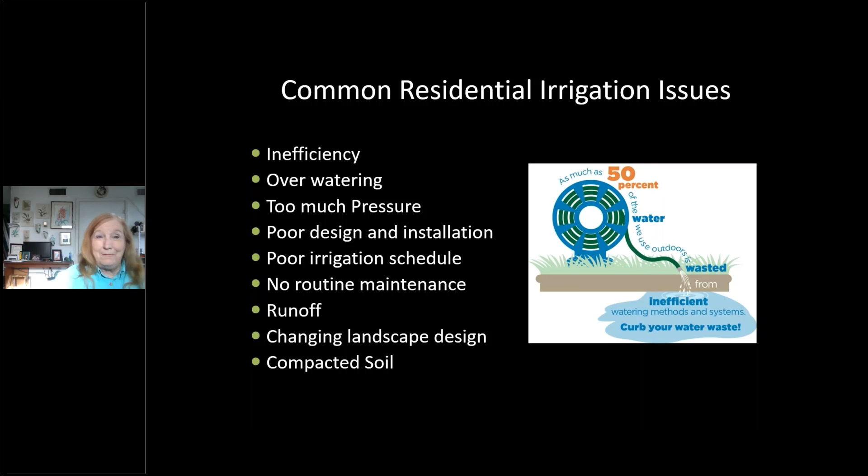And then compacted soil, because we have heavy clay soil, or most of us do. Having compacted soil prevents the water from entering the soil and going down through the soil where you want the plant roots to be. The deeper that the plant roots grow, the better off they are with irrigation infrequently instead of frequently. And right now, in most of our areas, we're limited to 2 days a week watering. In some areas, they're limited to 1 day a week watering. So, boy, you have got to make sure that irrigation system is very efficient in order to have your landscape look good all through the summer.

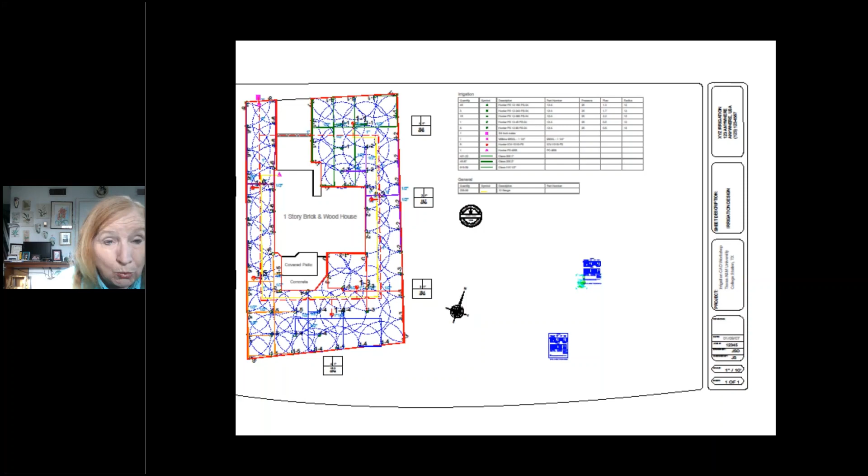And so as we go on down the main line, I'm going to go back one. If you look right here, this is your main line, your meter, your backflow prevention device, and look how it goes. It goes all the way down the side yard, through the backyard, the other side yard, and then through your front yard. Sometimes it's connected under your driveway, so it's a loop, and that adds to the efficiency of it, but not always. I want you to understand what that main line is, because off of every main line there's going to be a T to make what we call the lateral line, and the lateral line is where your sprinklers are. Right off this T, off your main line, there's going to be an irrigation valve that opens and closes according to what you've scheduled on your irrigation controller.

Think of your irrigation controller sort of like an alarm clock. You put a start time in there, and that opens the master valve, or if you don't have a master valve, it'll open the first valve. And then a run time, and then it'll go to the next valve and open that, and it'll run like you've programmed it to run. And then the next one, and the next one. Very important for you to understand. So the wires off of this are in the ditch with everything, and they go back to that irrigation controller. It's your controller, so you're going to schedule how you think your landscape needs to be watered. But we would like to give you some helpful hints about how to do that.

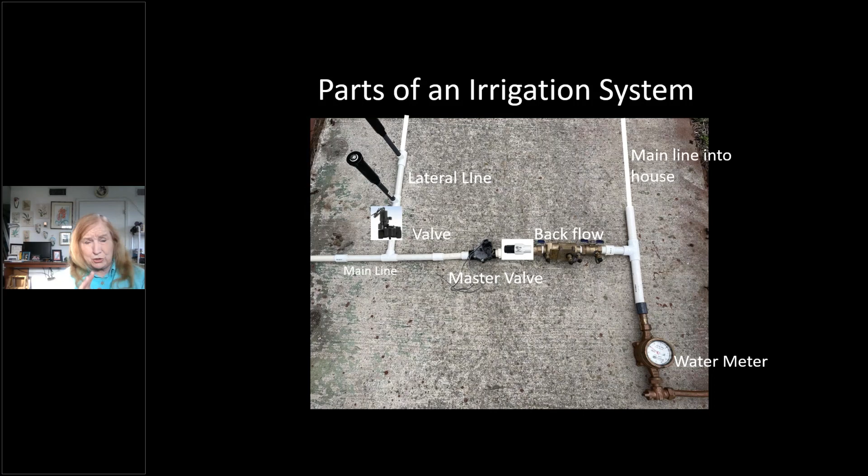Now, there's one other device I'm going to bring up, and did you see this fly in here? This is called a pressure regulator. If there's too much pressure going through your line, you might need a pressure regulator between your master valve and your backflow prevention device. It always comes after your backflow prevention device. Very important for you to understand. We'll show you some pictures of what too much pressure does.

Now, how much of your water bill is irrigation water? Like I said, I can look at my bill, and my water is the top line, and it tells me how much water I've used, and then how much I'm being charged for it.

And then I have a wastewater charge, and then I have an environmental charge, a stormwater charge, a garbage pickup charge, a recycle pickup charge. I have all these charges on here, and I can tell you right now, every now and then my husband complains about how high the water bill is, and he says you're using too much water. The water bill's too high. And I'm going, no, I'm using the same amount I always use unless you're taking more showers than normal. And of course, you know, he denies that.

But I look at the bill and I see what the water charge is and the wastewater charge is. And then I see what all those other charges are. And in the dead of the winter, the other charges are sometimes higher than the actual water charge on the water bill, because I'm not irrigating in the winter. It's very, very rare that you need to water during the winter. So my irrigation controller is usually on off during the winter.

Now, if we go 15 days without any rainfall, I might run it, but I'm not going to run it the same amount of time that I run in the summertime. We don't need that much water. And so I would cut that in half, or maybe even cut it by 3/4 the run time. And I'll show you how to do that on a controller. So for you to understand how much water is on your bill, I want you to look at your bill and see if you can figure it out.

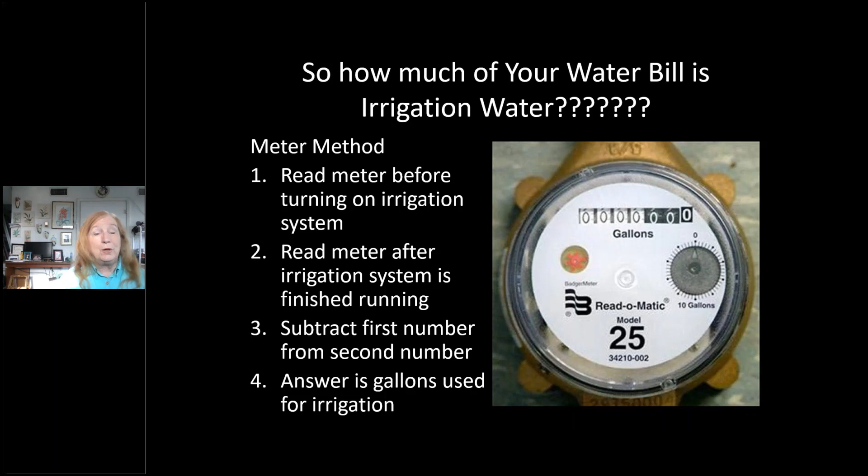And that just sort of, wow. I didn't know I used so little, or wow, I didn't know I used so much. Whatever the wow is, it's good for you to understand how many gallons your system is putting out. If you think that water charge is way, way too much, it might interest you to make sure your sprinkler system is working correctly and efficiently, mainly. And so you might call Tarrant Regional Water District and line up an irrigation checkup for that.

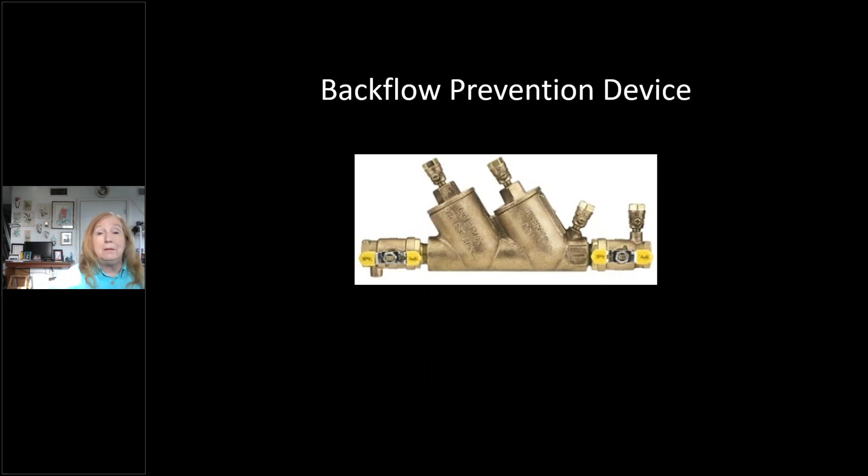The backflow prevention device, usually we use a double check valve, but sometimes an RPZ is required. It's usually put in after it branches off your main line that goes into your house to prevent irrigation water from backing up. These, to manufacturer specification, are required to be installed above the ground. I have a very, very old system, and mine is actually in a box in the ground. And with the new rules, they want it above the ground. And so this was installed at our community garden at the University of Texas at Arlington. And you can see it's above the ground.

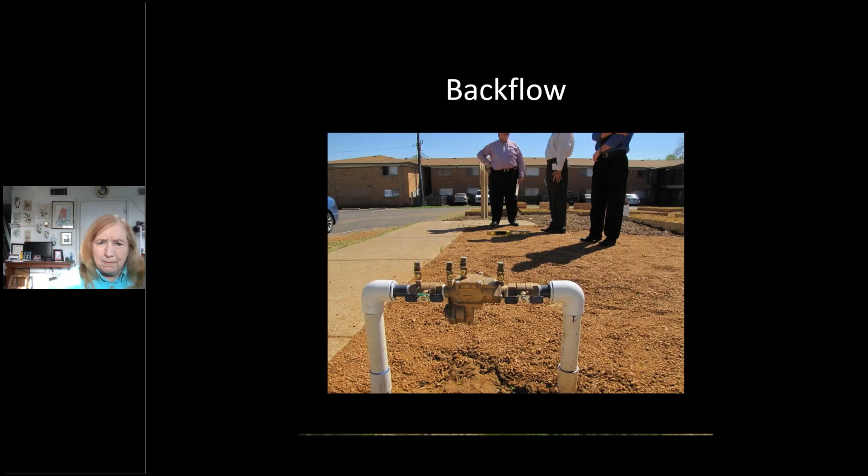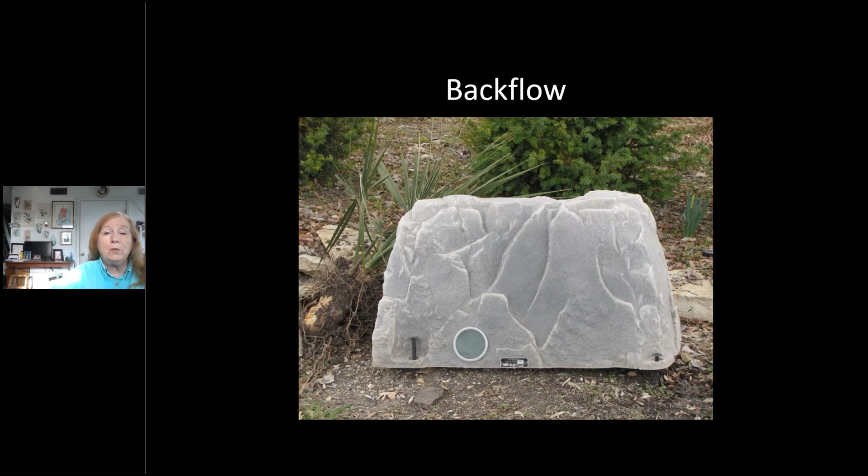And now one of the things that you can do is they can be wrapped, so they won't freeze. And they have wonderful artificial rocks that you could put over them to protect them from freezing. The wrap and the artificial rock come in gray and brown and different colors. This is something you're going to see much more. They just have plain Jane green boxes that they put over, with some simple landscaping around this, because you're not going to get into there very often. You probably never. But eventually we have inspectors that inspect your backflow prevention device to make sure that it's working correctly.

And the super good advantage to that, this doesn't happen often, but it is a nice thing to have that master valve in there, because if any of the lines break, this is very rare because it's so deep in the ground, but if any of those break, the water just comes and comes, and you can lose several thousand gallons of water before you get over to the meter or the backflow prevention device to turn the irrigation water off.

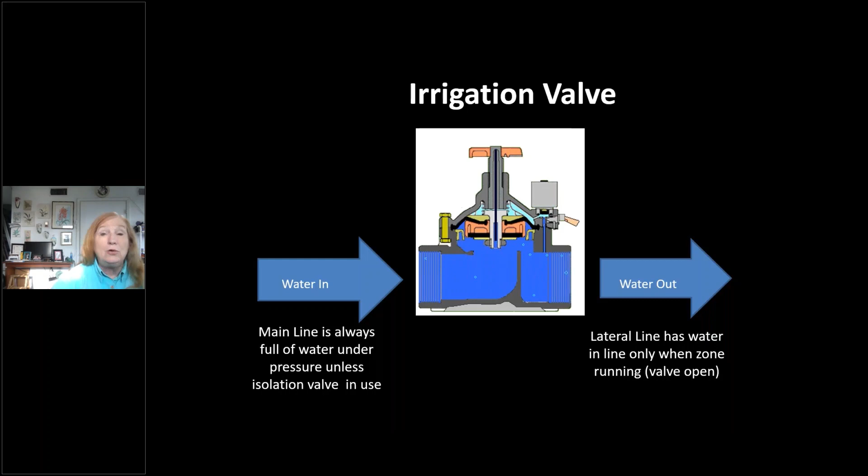And the reason 4 inches is what we all recommend is because during the summer, we always recommend that you let your grass grow taller, not shorter, in order to shade the soil and shade the new grass blades coming up. In order to get that proper distribution of water, we need that to pop up 4 inches, because usually we're allowing grasses to get up 3 inches and then cutting them back down to 2 inches. And then the next week we'll do the same thing. So this is very important that you understand the why of everything.

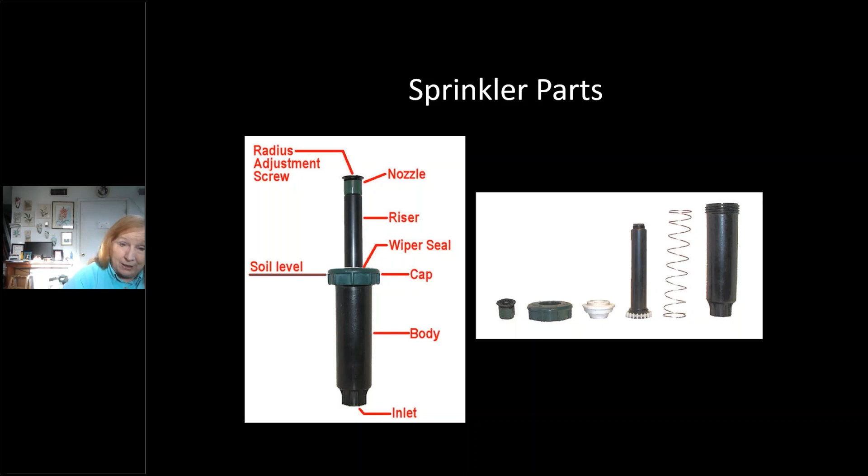If it's not, I want you to know that riser, how do I back up here? I'm backing up. This riser, you can grip that while the water's running, and then you can move that nozzle. Some move both ways, left or right. You can turn them, but some only move one way. And so you might get wet while you're doing that, but it's well worth it.

So please understand how your controller works. Please understand that every manufacturer of every piece of irrigation equipment has the same goal in mind as Tarrant Regional Water District has teaching you, and that's water conservation in the landscape. And so they have a 1-800 number that you can call and have a technician speak to you. You can stand right there in front of your controller, talk to them on the phone,

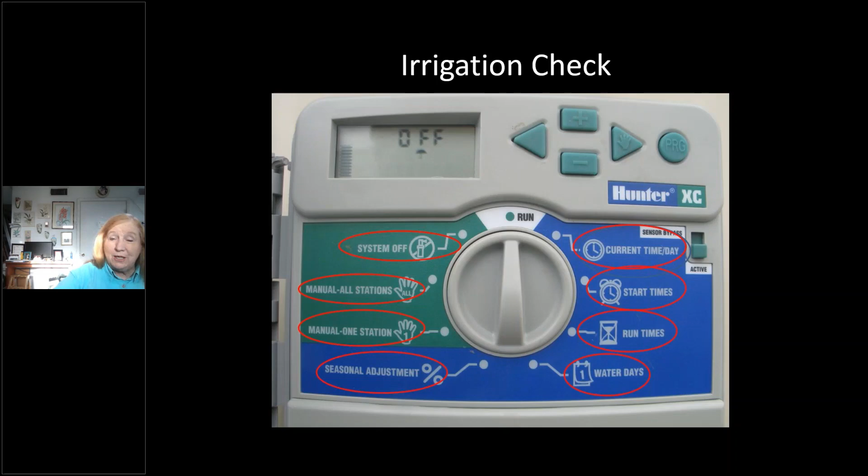and they can help you program your controller. You can ask Tarrant Regional to send out their irrigation checkup irrigator, and he could show you all that. The main thing is help is available at a phone call, at a website, wonderful websites the irrigation companies have to show you how to do things like this.

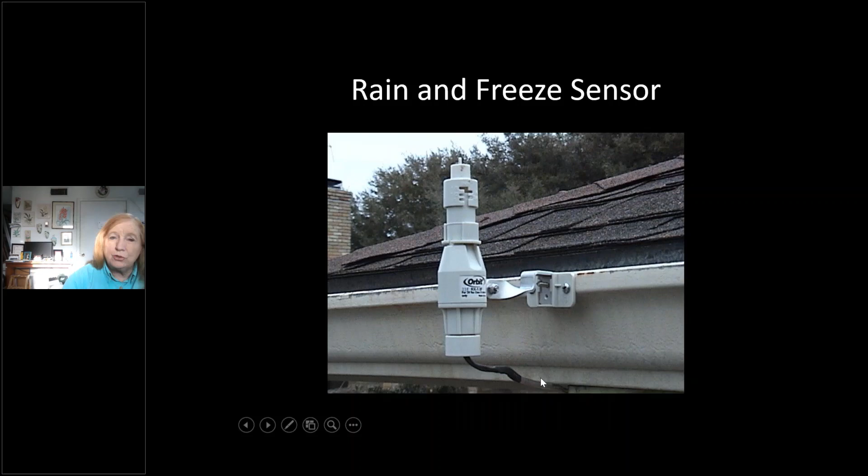And the reason why this is important is because irrigation controllers that are ET controllers take this information and do wonderful things. They might irrigate less, they might not irrigate at all. We love to get the emails from Tarrant Regional Water District saying it rained such and such, so you don't need to water as much as you usually do, or you don't need to water at all.

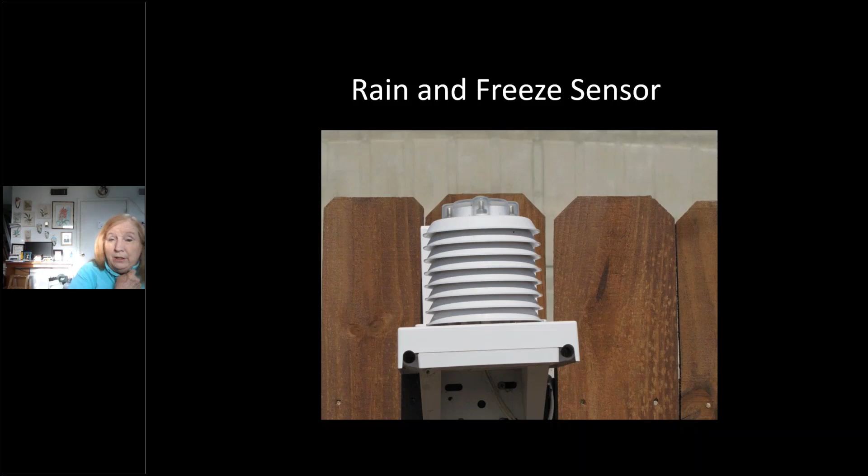This is so important. Unless you're keeping a rain gauge out there, how do you know if it rained enough to get the water down that you want down? So these are very, very important things.

Now in your flower beds, shrub beds, ground cover beds, anywhere you've amended the soil a lot in order to grow these things, and you keep a mulch there that decomposes and becomes part of the soil, that doesn't mean the same. The infiltration rate there is much increased because of that mulch that's continually decomposing. It doesn't allow that clay soil to become as compacted, because you're not walking on it, so it's not becoming compacted like it is in a lawn area.

Of course, if you have a slope, that infiltration rate is even less. So we've got to understand this aspect of the clay soil in inches per hour. The actual goal of irrigation is to get water into the soil where the roots can use it. It's not to wet the plants themselves down, although there is canopy capture of irrigation water and rainwater. But the main thing is you want that water in the soil where the roots can use it.

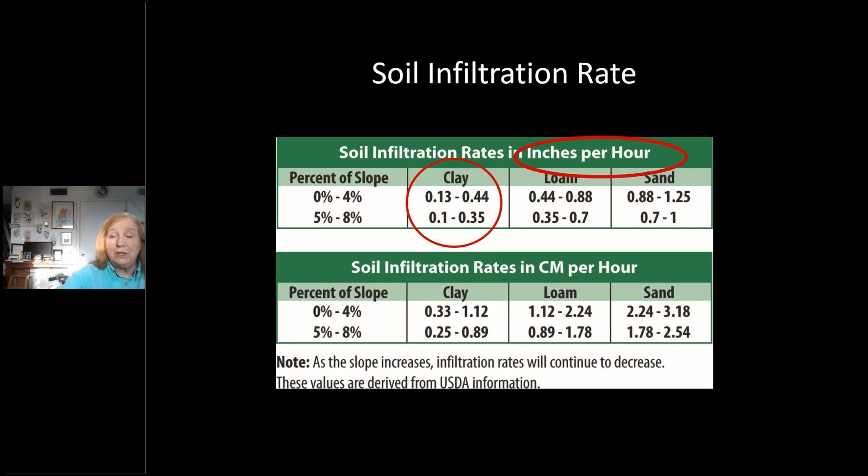Now, of course, clay soil is going to expand and close those holes. So if you would have a bunch of compost ready to put on top of your lawn before those holes close up, the soil swells and closes them up.

What the advantage of that is it's like putting a fertilizer on there. You get an immediate reaction. This is usually done in the springtime, after your third mowing. If you have compacted soil, or if your lawn looks really bad after the freeze we've had this winter, this is a way of rejuvenating a lawn area.

You would not do that in a ground cover area, flower bed area, or shrub bed area, because if you're putting mulch annually, or some people put it twice, once in spring and once in fall, they put a mulch down that decomposes and keeps the soil from getting compacted.

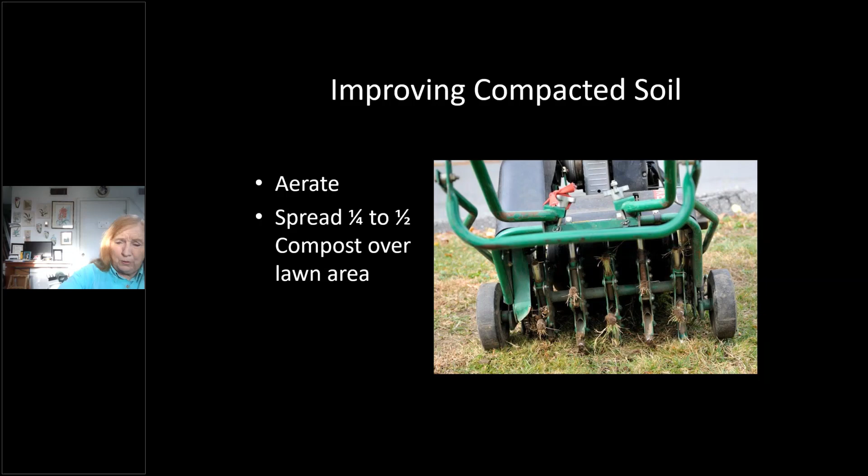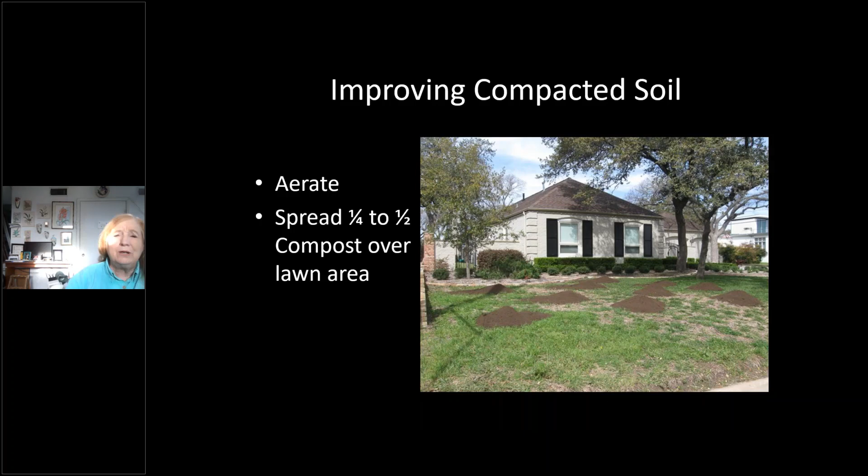Now, if you can't rent the aerator, or if you can't get a landscaper in to do it, just putting it on top of your lawn is better than doing nothing, because it will rejuvenate this lawn very, very, very fast.

Now, calculating the runtime. This is one of the most important things that you yourself can do. Instead of guessing at it, you want to do this. So the first thing you need to know is what your precipitation rate is. This is the rate in inches per hour that your water comes out of your sprinkler system.

Tarrant Regional Water District is giving you these catch cans. If you go by your library, they will give you a booklet with all the instructions about how to do it, but they're going to give you the catch cans too. And I'll show a picture of it in a minute.

This is very important that we know that inches per hour, and therefore that helps us with this runtime a little bit. The other thing that goes into this also is the infiltration rate and the percolation rate. How long does it take the water to get down to 4 to 6 inches? This is what's good. This is what you want to do. So how long does this take?

So if I wanted to put my catch cans out and I wanted it to run for, say 5 or 10 minutes, I can look at how much water is in those catch cans and see, and that's a time I want to keep in mind. So did it put out a 1/4 inch, or did it put out a 1/2 inch? Did it put out a 3/4 inch? How much did it put out? And that gives me this inches per hour.

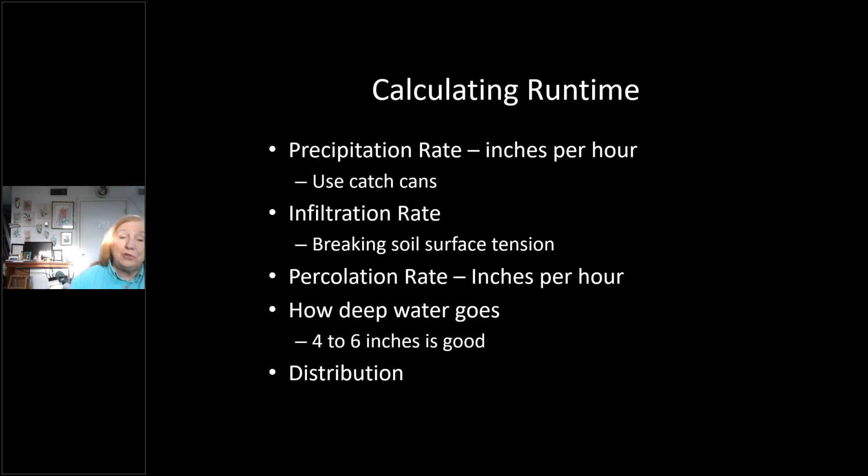Now, also what the catch cans can do for you is figure out, is the distribution good? So if I put my catch cans out, I'm going to look at how much water is in there. I use tuna cans a lot. This is what Tarrant Regional Water District's going to give you, and they have wonderful logos on here, but over here they have 1/4 inch, 1/2 inch, 3/4 inch, an inch, so that you know exactly how much water is coming out.

And if I put these cups out in an arrangement, let's say, here's my sprinkler head, and I'm going to put some cups out. And if this cup is full and overflowing, wow, that's a lot of water, because those cups are 1 inch. But this cup has hardly any in it. This cup has hardly any in it. What does that tell me about my distribution?

So what I have to figure out is why the sprinkler is not covering this whole area if it's supposed to be covering that area. So if it's filling up this one here, maybe this one here, maybe this one here, maybe this one here, that coverage has a lot to do with the even distribution of the water. And so you want it as even as possible.

So you need to check that nozzle and make sure it's throwing the water out the correct pattern and the correct distance. Nozzles wear out because we have calcium in our water, and that might be a problem if it's 10 or 15 years old. It's very, very easy, not to buy a new sprinkler head, but to go buy a new nozzle, knowing the distance you have to throw the water and the pattern that you want it to go out, half circle, full circle, 3/4 circle, like that. So very, very easy for you to do this. If you get the free irrigation checkup, they'll make suggestions like that, and it's something you can do yourself.

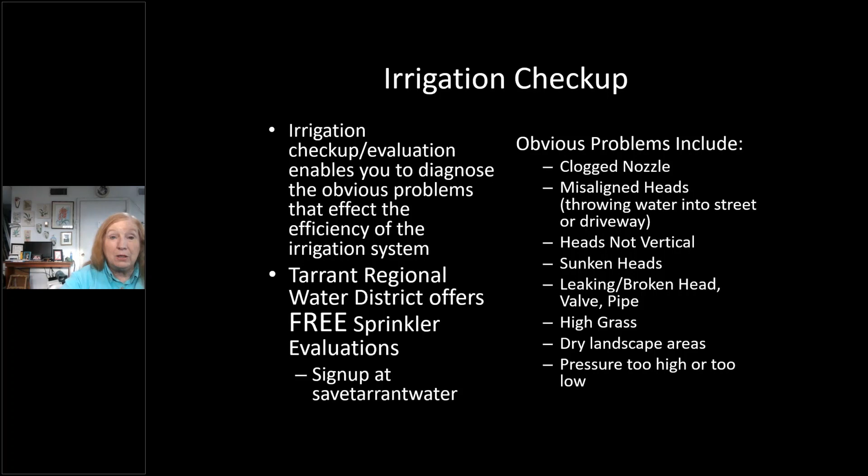When we talked about this with some of the cities, we made flags: find it, flag it, and fix it. A lot of people don't like leaving flags in the lawn, especially with kids or pets, since that can be a hazard. But you can draw a sketch on a piece of paper on a clipboard, mark here's my sprinkler heads, this one's working good and this one's not, then go back and fix it that way. Some people use popsicle sticks and stick them in the ground at the heads that aren't working well.

High pressure—is this a sprinkle or is this a mist? If the wind's blowing, if it's a hot day, how much of that's going to evaporate? How much of that's going to blow away? This is why high pressure is not good. We want it to sprinkle.

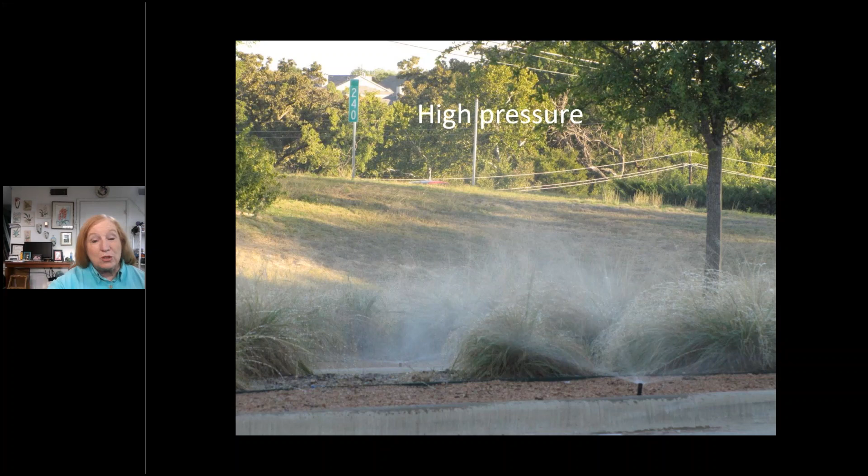Also, they've changed the landscape design. Here's the sidewalk—what is a sprinkler head doing here in the decomposed granite buffer? It needed to be moved or capped off. You don't want to irrigate areas where you don't want things to grow. Unfortunately, things will grow, mainly weeds, without irrigation, but this is what's called high pressure. It's not sprinkling, it's misting, and you're going to lose that water.

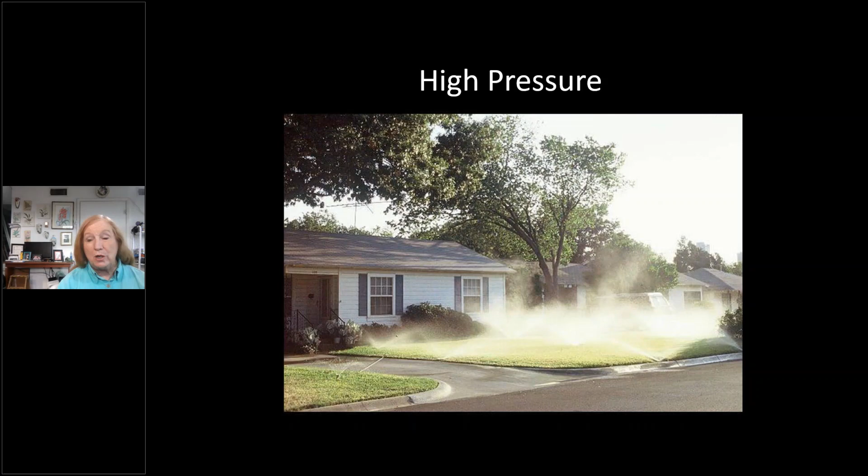Otherwise, you'd hear that thump, thump, thump as they come on. So that's not a problem, but it is outside in your landscape. And so the other rule change that benefits everyone is not to put the sprinkler heads right up next to the sidewalk or the curb. Put them 4 to 6 inches away from any impervious surface like a sidewalk, a driveway, a curb, and it stops the back wash.

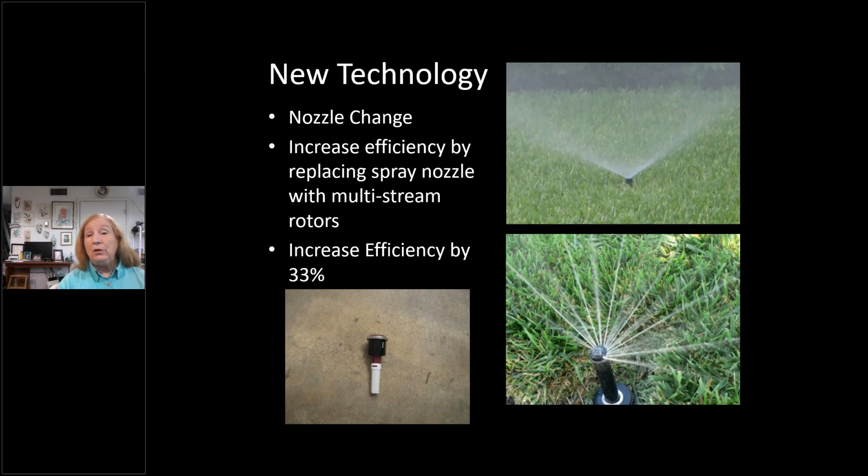Of course, it increases the efficiency tremendously because it puts the water out in heavier droplets, so you're not going to have so much evaporating or the wind displacing it. It's a nozzle change, not a sprinkler. This is something you could do yourself. Of course, before you go buy those nozzles, you need to take notes and draw out your sprinkler system and see how many full circle, half circle, quarter circle patterns you need. The manufacturer's research, backed up by university research, says it increases the efficiency by 33%. So you have to know the pattern and the distance you want the water thrown out of that nozzle. A great new technology that all of us might want to look at.

The other one is drip irrigation. Now, this is not new by any means. I've been using it in my greenhouse for probably 20 years. And vineyards and orchards have been using it for 30 years probably. That's how they so efficiently water their trees and their grapevines. And so this is a quick conversion, a little bit of digging and a little bit of trenching involved. These trenchers can be rented from rental places or from irrigators, or you can hire an irrigator to make the change for you.

The trenching is only done in a lawn area. In a shrub and ground cover area, all the drip irrigation can go above ground, and then after you put all your plants in, you can cover that with mulch. And very, very efficient. And everyone that makes the drip irrigation tubing, Netafim, Rain Bird, Toro, they have great tutorials on their websites to show you how to do that yourself.

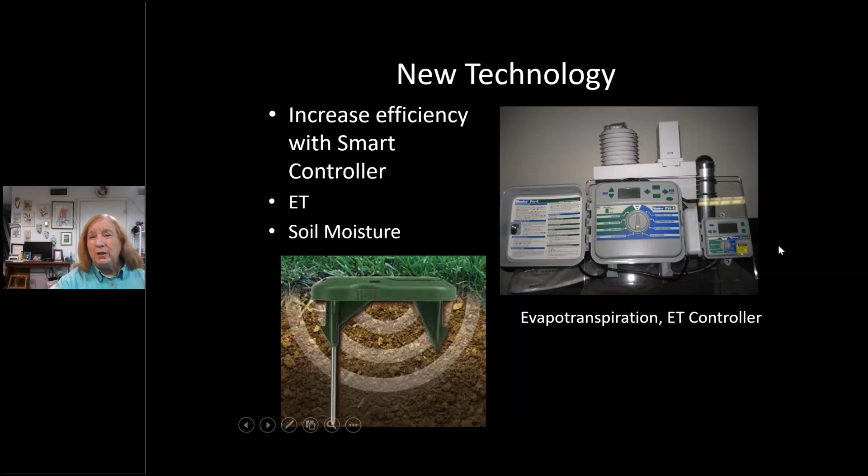The other one is a soil moisture sensor. And this is a wireless one where you actually stick it in the soil. There's 2 prongs that go down in there, sends a little tiny electrical field. And if the 2 prongs read it real fast, that means the soil's wet, and it overrides your sprinkler system from going on. There's a little computer chip in here, and it talks remotely to it. And again, there's going to be a module like this that you hook to your irrigation controller in order to have it speak to each other to do that.

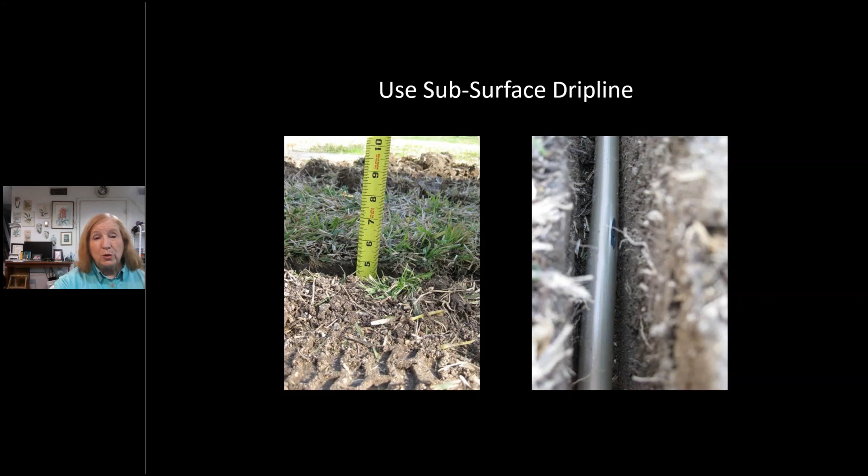Okay, I know I'm going out of time, but a lot of people don't understand about the subsurface drip line to go into your lawn area. So I just wanted to show you this real quickly, how wonderful that could be for you in those narrow areas where you lose a lot of water. It's just a wonderful, wonderful thing. It puts the water out very, very slowly under low pressure. And so it looks very, very nice. This is 90 days. Of course, this is summertime. Winter, it wouldn't be that quick.

The cycle and soak irrigation schedule I was telling you about. Of course, you have to determine your runtime for each zone. Not going to be the same. My ground cover bed on the south side of my house, I've got it scheduled to irrigate for 10 minutes, and it works there. But my lawn area, I got it scheduled to do 20 minutes. Every zone does not have to have the same runtime. You need to get your catch cans out, your screwdriver out, or you can dig a hole too, to see how fast and how far that water goes into it.

The main way you want to use this is your lawn area, and particularly slope areas. Now, a lot of people say you could make your run time as little as 5 minutes. I have one irrigator who said on clay soil he'll put his at 3 minutes and run it 4 or 5 start times. But this is the idea, to run it in these areas 2 or 3 short cycles, whatever that needs to be, instead of 1 long cycle.